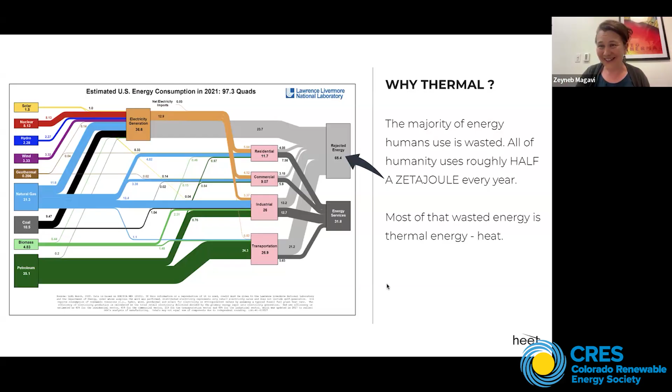I think it's a cool unit, never knew it before. But here's the crazy part. Yeah, there we go. The Earth today is absorbing more than 10 times that every year from excess heat from the sun. So climate change is a thermal energy challenge.

At its core, it is the warming, though we don't call it global warming anymore, it is the warming of the Earth. And the ocean, the bedrock, and at the tiniest scale, the atmosphere, are absorbing extra thermal energy because of the greenhouse gases around us.

So that combination of the thermal energy that exists in our Earth, the thermal energy we waste, and the thermal energy that is extra because of climate change, all of that together is a massive thermal energy opportunity. And it's just beginning to be recognized.

So the International Energy Agency, IEA, published its first ever report on geothermal this past fall. And in it was this sleeper line, it wasn't the biggest focus, but it just says the technical potential of geothermal will be more than enough to meet all heat demand. And then it just lists continents. So there's this scale of opportunity that is just beginning to dawn on humanity, on people, on governments.

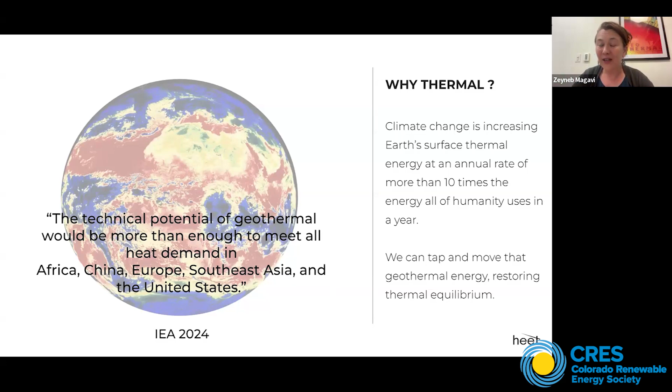We haven't been making little bar charts of here's all the thermal. We've been ignoring it. But that tapping of this thermal opportunity is possible thanks to geothermal heat pumps and to thermal energy networks. And it is a way for us to not just meet our thermal needs as a species, but also to help restore our Earth and rebalance or achieve thermal equilibrium.

So I'm just going to spend one moment, because Colorado is blessed with many forms of geothermal, just to make sure everyone here knows that today I am talking only about the geothermal technology pictured on the right. I call all of these together the whole geothermal family. Geothermal like the last name. Geothermal power is awesome. You guys have some of it. I'm in Massachusetts, we have none of it.

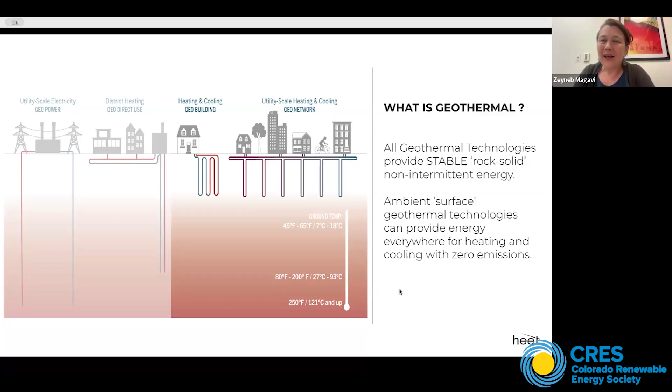We don't even have the direct use like the hot spring, but what we do have is the one on the right, where we've taken a geothermal heat pump and turned it into a kind of utility scale technology. I call both the geo heating and cooling and the geo network ambient or surface geothermal technologies, that everywhere and anywhere are geothermal. They're the geothermal that can work everywhere and for anyone, and all of them, of course, are stable and rock solid.

All right, so having understood that we're all on the same page, I just want to comment a little bit on the organization I lead, HEET, which started out actually as a bunch of neighbors doing barn raisings for our local buildings to weatherize them, and grew over time, based in a location with a lot of nerdy people. We just kept learning and iterating and growing.

And so our approach is to try to solve the big complex problems by engaging everybody, and finding the key levers, the biggest problems are sometimes the biggest solution opportunities, and then innovating and iterating together until we have alignment where all of the core stakeholder needs are met, which then allows for this kind of spectacular forward momentum in a way that doesn't happen when you don't have that alignment.

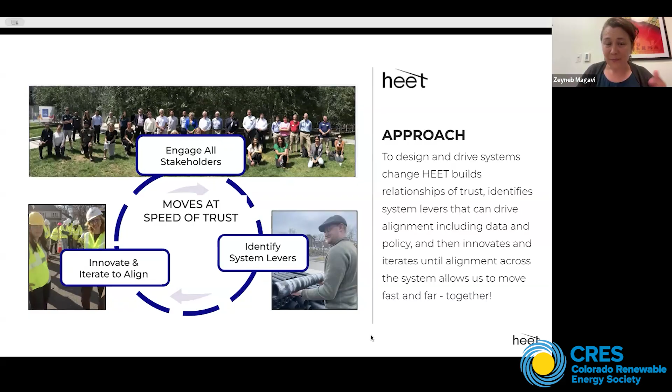So through that process, I'm having a little trouble clicking here. Let's see. There we go.

We attempted to figure out how to deal with the very challenging problem of rising affordability for heating and cooling in our region, combined with an aging gas system that required investment. We're kind of at the end of life cycle, a bunch of aging pipe. If we put money into it and we have climate emissions goals and we have affordability challenges, how do we make that work? It was like we had trains running in opposite directions on the same track.

And so trying to solve that problem, we brought together every core stakeholder group and worked to define the core system needs that everyone needed to move forward. And that included the workers on the gas system and the academics and the customers in a household, and pretty much every group we could, we brought together, and we built trust and talked.

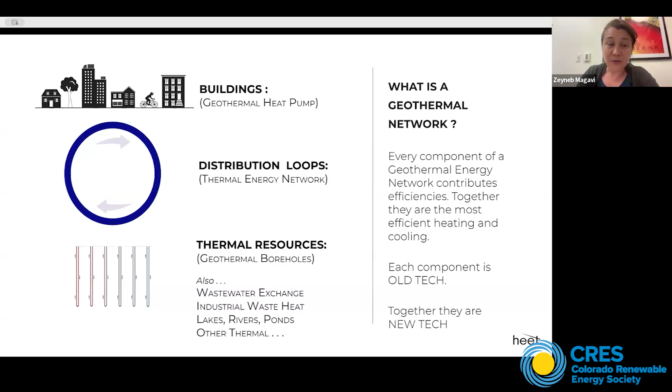So this is for those of you who are way in the weeds on thermal energy networks and are wondering what the heck is the difference between a district energy loop and a thermal energy network, and what is a geothermal energy network. I promise you really don't need to dig into this, but I think one of the core things to understand is the reason we started using the word network is because we moved from a two pipe to

a single pipe and allowed a very straightforward, ease of use utility growth model where you could add and subtract and interconnect these loops, allowing for a kind of scaling that wasn't typically done in other approaches to districts, even those that included geothermal. And so you get a bunch of different network effects, hence the name.

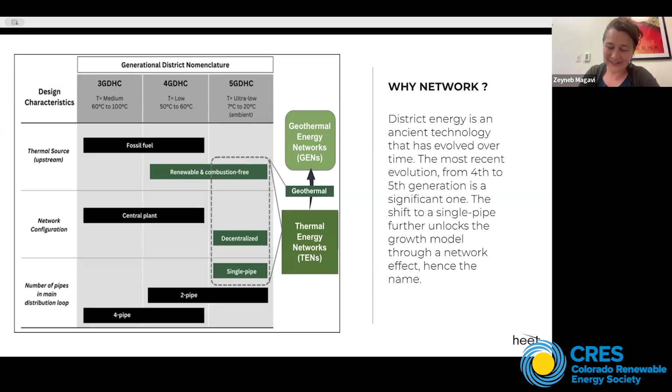And that modular growth piece is really the critical piece, because the minute you shift to a utility model, regardless of ownership, we're just talking about when you interconnect multiple diverse customers, you are a utility by definition, regardless of who is the owner. And that utility growth model allows for the long-term financing of a utility.

And part of the challenge with the straight up geothermal heat pump for a building has always been that for decades it's been the lowest cost heating and cooling. It's been the most efficient heating and cooling. And the reason it hasn't taken off and we don't all have one is partly because it requires the building owner to have the financial capacity to pay upfront or to finance upfront the cost of the system.

One person put it as, it's like you bought a car and you have to buy all the gas right when you start. And that's a really interesting way to talk about the financing model. Most of the cost is up front. The ongoing costs are incredibly minimal. And so the financing model is the challenge, and the utility financing model is all about upfront, high infrastructure cost, long-term payback for societal good.

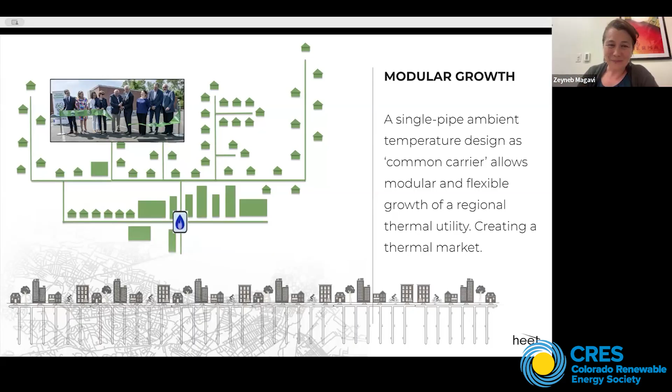So once you unleash that scaling and the modular effect, each loop being like a Lego block that can interconnect and grow neighborhood to neighborhood, you can create a thermal market. As you scale that thermal market, you have a whole bunch of other thermal opportunities, larger scale and more interesting opportunities for storage, for peaking, etc.

So it currently is serving 140 customers. It's meeting all heating and cooling needs. And just before this talk, we were running our research team report looking at the data from the ground and from the loop, and it's essentially performing wonderfully. It is heating and cooling safely with no combustion, and it has not increased the electric grid load for the neighborhood at all.

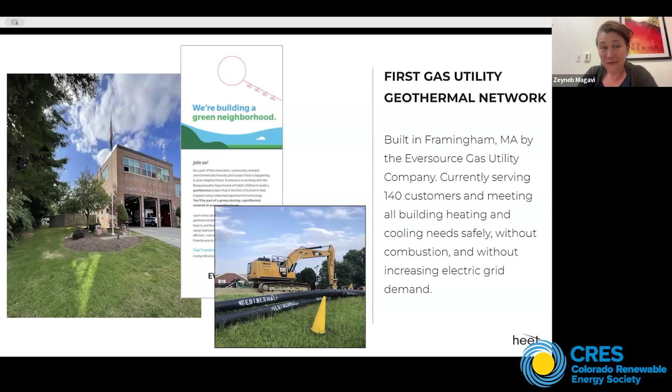So initial indications, and this is one of the buildings hooked up, are that this has actually demonstrated the potential for each and every one of our core stakeholder needs. And to me, that is really the reason why we've had such an extraordinary momentum and communication around this technology and scaling, to the point where today there are 26 utility thermal energy

networks in process. There are 30 gas utilities meeting monthly that represent 50% of the gas customers in the US. There are 12 states that have passed laws around or supporting thermal energy networks. That's an extraordinary scaling.

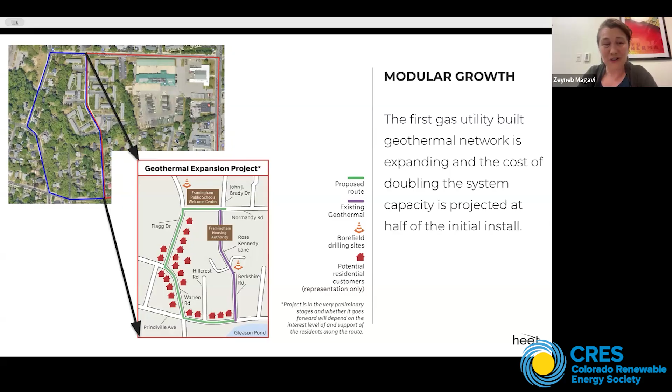And speaking of slightly less scaling, but really critical, the Framingham first loop project that I just shared, we were able to get a DOE grant to design a second loop pictured here. And we were able to take all of the technical learnings from that, apply them in the process of designing the second loop, and both from scale effects and from learning curve effects, basically drop the cost in half from first loop to second loop, which was exactly what we wanted to see happen and very exciting. And that has been awarded funding to move forward to construction, and hopefully that will begin this fall.

Speaking of construction, one of the key pieces of this equation is the workforce. And it's a really fascinating topic, because on the one hand, we have on the left some of the gas pipe installers in Massachusetts, workers who were installing gas pipe the week before they got to this site. They had a couple hours of training. They began installing geopipe. They did it pretty much on time and on budget, and then went back to installing gas pipe afterwards. It's pretty much the most smooth and successful workforce transition pathway you can imagine.

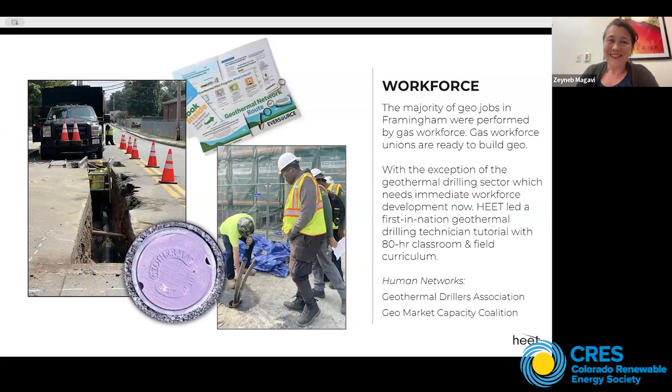The gas sales force used these lovely marketing materials, went knocking on doors, had one of the best sales days of their lives, changed their name to the Thermal Solutions sales force, and kept right on going. But drillers, there's no analog in a gas utility for the drillers, and there's not enough drillers. In fact, Colorado also has a similar challenge. The drilling workforce around the country certainly isn't up to the opportunity of what we need to do going forward. And so we launched a drilling training program and started working with a new group called Geothermal Drillers Association to try to build a good pipeline of new drillers to build the future.

So I'm going to comment one moment on a rather geeky topic that I think matters a lot more than it looks like, and that is the electric grid impact. You'll probably hear people talking about data centers and electric demand, and we're all worried about our electric demand, but we're also worried about electric cost, and really understanding that our annual demand curve from the electric grid is what drives both the cost and the need for expansion, and the peak is driving that, and the distance between the peak and the trough drives cost.

This is a chart called a Falcon curve, just showing that the efficiency or the type of technology chosen for electrification really dramatically changes the peak, the cost, the outcomes for the electric grid. And there's been this incredible piece of research from one of the national labs showing that just shifting from air source to ground source, so that's the blue line to the green line, in the US, at about 60% of our buildings, would save 1.5 trillion by 2050 on the electric grid only.

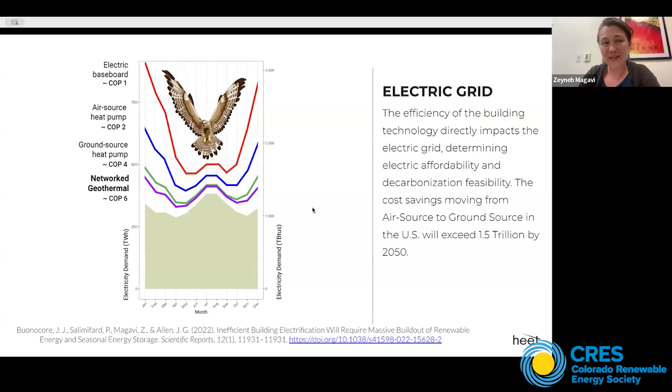So if you leave with one thing from this, aside from it's a pretty falcon, it's the idea that the electric grid costs and need are interconnected with your decision about how to heat and cool your home, or your buildings. And so network geothermal is one of the most efficient, effective, and load flattening ways to do it. Therefore, that benefits the electric grid going forward. And that is just some more details on the extraordinary impact of going to geothermal heat pumps on our electric costs of all kinds.

And so why, if there's all this incredible cost on the electric grid, why are we talking about a gas utility? Remember the workers who are putting pipes in the ground, and workers doing load management. Those are all really good analogous workforce transition opportunities. And there's also a lot of pressure in many states to really imagine an energy system without gas, which begs the question, how does one go from having a gas system to not having a gas system or a minimized gas system?

And to do that in a way that doesn't hurt the existing customers really requires a kind of stabilized transition. So one of the things that we've proposed is this gas to geo, that where you have a gas system, if you incrementally, street by street, begin to move customers from gas to geo, you can really achieve such an energy transition without destabilizing the company, the customers, or the workforce. And I think that has been a very attractive message, as you can see, for a lot of gas utilities around the country.

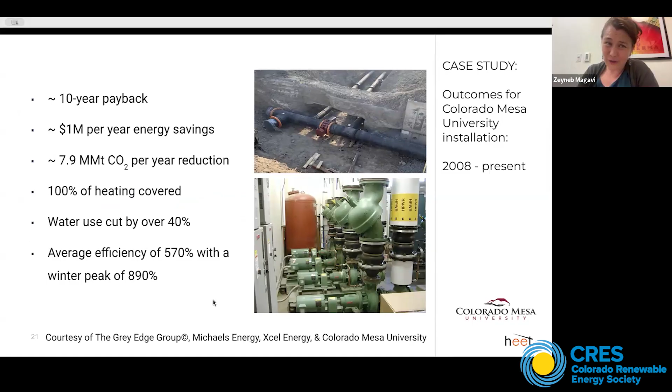So we've been on a long policy journey in Massachusetts. This is just a quick image to give you a sense of it. But over the past several years, we've been kind of building these networks of people on different topics; they've been noted on my slides as I go. So for example, there is a regulator forum. Colorado's a participant, looking at how does one regulate this in a rational way. There's an advocacy network. What are the correct things to say to communicate and educate and help legislators understand the opportunity? You in Colorado are way ahead and doing a fantastic job. And I think we're all building the policy pathway as we go.

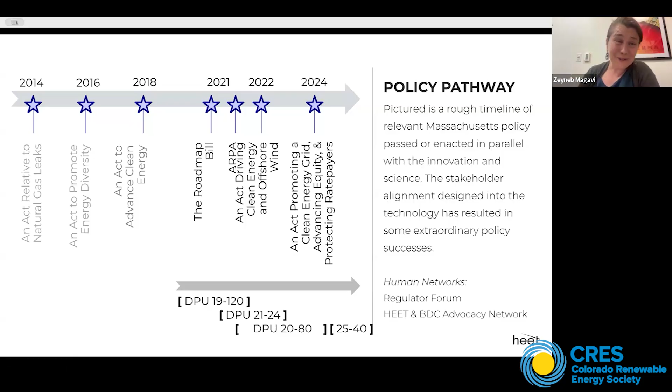That doesn't mean there aren't a bunch of questions. There's questions about how one meters or bills. There's questions about ownership. There's questions about optimization. And there's a lot of questions about cost, because different types of designs and approaches create different cost outcomes. And that's one of the things we're really exploring. And so there's this crazy project pipeline. We've got tons of projects in Massachusetts. There's projects all over the country. I mentioned 26 utility projects, but there's also projects all over the world now.

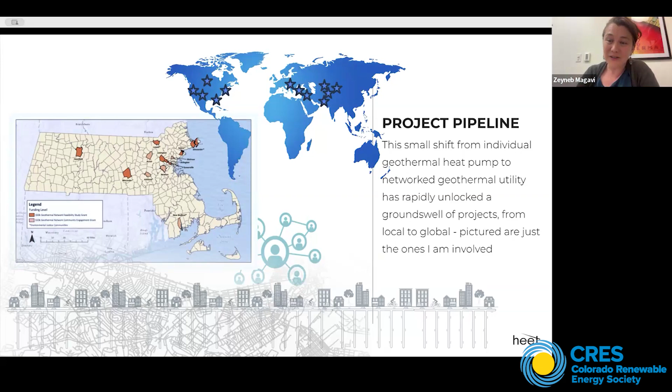The World Bank is funding 10,000 building scale projects in a bunch of Central Asian and Middle Eastern countries. And in my dream world, every one of these projects is going to submit the same data set to the data bank. And we're all going to learn together. And to me, that process of learning is going to help everyone and lift all boats and help us get to the best energy system we can. And along the way, I've put Mr. Don Buell, one of the lovely residents in Framingham, in the housing that received geothermal.

He invited a French journalist into his apartment to take his photo, and she wanted him to take the picture with his geothermal heat pump console. He did not want that. Don wanted to have his picture with his window. Why? Because what he cared about with his new geothermal was that the window AC unit was gone and the sun came in the morning onto his piano, which he loved to play.